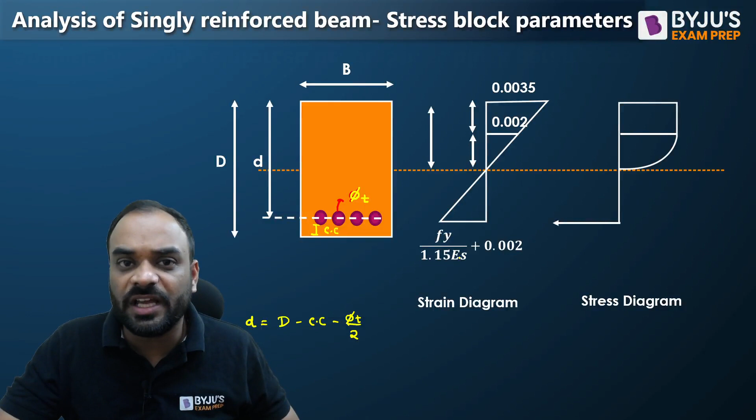What is Es? That is the Young's modulus of elasticity of the steel. If the value is not given, you need to consider it as 2 into 10 raised to power 5 Newton per mm square. So let me write it down. Es is equal to 2 into 10 raised to power 5 Newton per mm square.

Okay. Now guys, another diagram we have is our stress diagram. In the stress diagram, the stress at the level of tension steel is 0.87 Fy. How is it 0.87 Fy? Because the permissible value of stress at the level of tension steel is given as 0.87 Fy, and the partial factor of safety in case of steel is equal to 1.15. So you are able to calculate this very easily.

Let me show you, guys. So permissible stress at the level of steel is equal to 0.87 Fy. How can we write it? Fy divided by 1.15, as this is the partial factor of safety for the steel. If you calculate this, you get the same value, which is 0.87 Fy, right?

The next stress, available at the top fiber of the concrete, which is in bending compression, is equal to 0.45 FCK. Again, this is a permissible stress according to the LSM method. Now guys, how can we calculate this?

Again, it is very simple. So you can write it down. The grade of steel is FCK, or you can say that, but not grade of steel, it is basically the characteristic strength of the concrete is FCK. Now you need to divide this particular value with the partial factor of safety, which is basically 1.5, right?

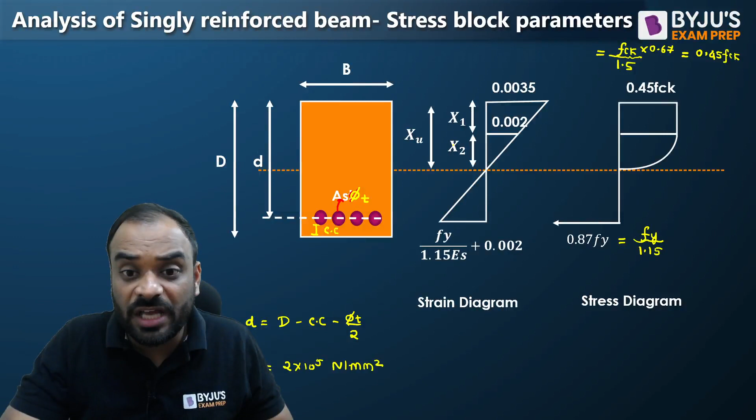Now what we need to do first, we need to analyze the strain diagram so that we can find out the value of x1 and x2 easily. Okay, so let's do the analysis on the strain diagram first. So guys, this is our strain diagram. Let's calculate the value of x1 and x2. We know the value of strain at the top, it is 0.0035, at this level 0.002, and at the level of tension steel, it is equal to Fy divided by 1.15 ES plus 0.002.

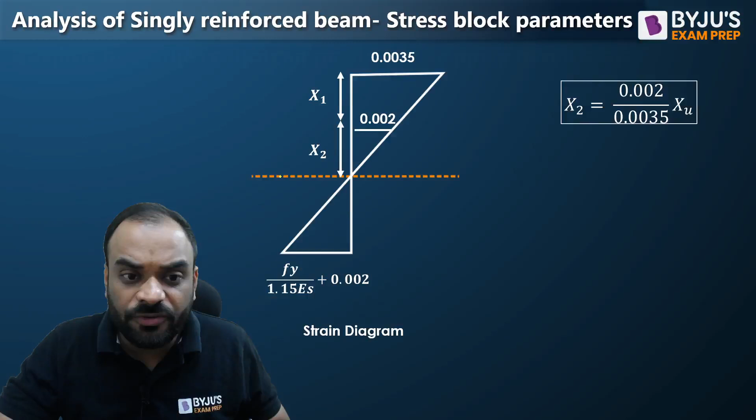Now guys, let us consider this is x1 and this is x2. And what is the value of x2, how we can calculate? By using similar triangle concept. Right now you are able to see here guys, at the level of xu from this location, the value of strain is how much? 0.0035. And at the level of x2 distance from this particular point, it is 0.002. If you take a similar triangle concept, you are able to get the value of x2 easily. And how much it will become? 4 by 7 times of xu.

Clear? Now guys, you can see here the relation between x1 and x2 is equal to how much? x1 plus x2 is equal to how much? It is equal to xu, right? So if you put the value of x2, we'll get the value of x1 easily, correct? So kindly see this, x1 is equal to how much? Just a second, x1 is equal to how much? It is equal to 3 by 7 xu. Now you are able to get the value of x1 and x2.

Done. Now guys, after this, we need to analyze the stress diagram. But to analyze the stress diagram, we should know how to calculate the forces in case of stress diagram. And there is one more point we need to understand. If it is a simple geometry, then we are able to calculate the centroid and the area of that particular shape easily. But guys, if you have a parabolic condition, then what should be the area, what should be the centroid location, that we need to understand. So that's why we need to discuss one simple funda for this particular analysis also.

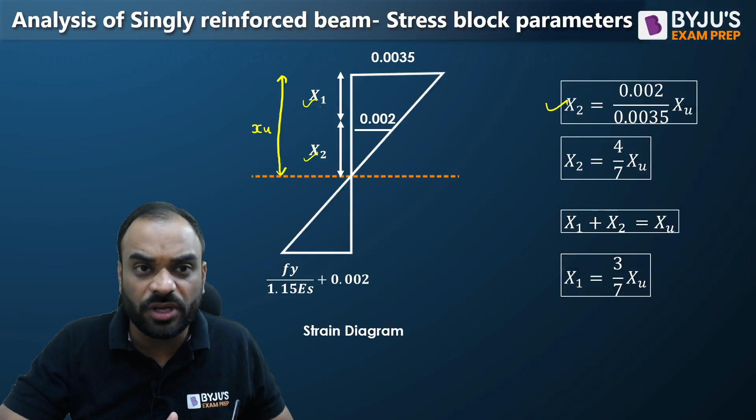Like we will take one rectangular area and we will divide it in two portions. One is 2/3 of that area and second one is 1/3 of that area. And we will discuss what should be the area exactly and what should be the centroid location. Okay. So this is our rectangular shape in which I have drawn one parabolic curve, right, which is trying to divide the area in two parts. One is basically 2/3 area and second one is 1/3 area. So let's understand what are the centroids we have.

Okay, let us consider this is the length L, right, and this is our width B in this direction. Okay, now these are the two areas which we have, 1/3 of B into L and 2/3 B into L, because the total area of rectangle is equal to how much? It is equal to L cross B, correct?

Now guys, what is the centroid for this particular portion? What is the centroid of this particular portion? Let's understand. So this height is basically B. So the centroid of this particular area will be 3/4 times of B from this particular point to this point, and from this point to this point it is 1/4 of B.

In the same way, we can write it down in the direction of length also, like it is 1/4 times of L in this direction and 3/4 times of L in this particular direction. Now what is the centroid of this particular area? It is 3/8 of L in this direction and it is 5/8 of L in this particular direction. Similarly guys, in this direction it is 3/8 of B and 5/8 of B.

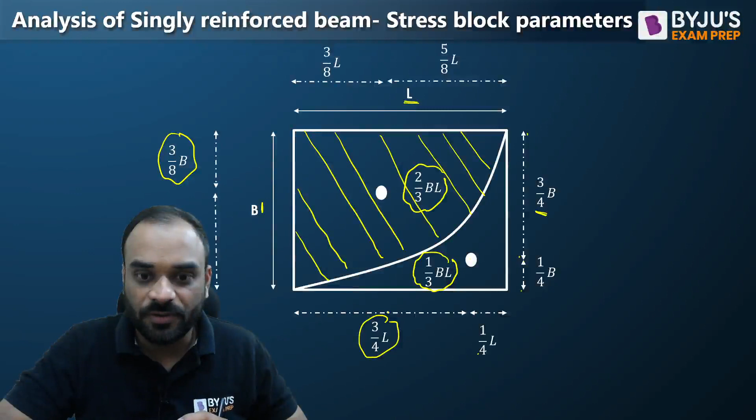Now which area is major for us? We know that guys, in our stress block parameter and in our stress diagram, this is the area which is available in the compression zone, and this area we need to analyze, right? Let me show you that particular area in our figure. So you can see here guys, this is the area which is our 2/3 of B into L, and that we have to calculate also, right?

So guys, in the stress block parameter analysis, we need to find out what should be the total compression force and what should be the total tension force we have and what is the value of lever arm. So let us calculate the C1 force first, right? And then we will calculate the C2 force also. And then we will discuss what is the value of T force and what is the value of Y2 distance.

What is Y2 distance? It is the location of this particular C2 force from the top fiber. In the same way, what is the location of C1 force from the top fiber? That is basically Y1 distance. So let's find out what it is exactly, and it is very simple. Okay, so guys, you already know what is the value of x1 and what is the value of x2. Okay, now let us calculate the C1 force.

So how much is it? C1 force is equal to how much? You need to calculate the area of stress diagram multiplied by width of cross section at that particular level. So first of all guys, we'll try to find out the area of this particular rectangular part. Clear? Then we will calculate what should be the width at that particular level in the beam.

Very simple. So first just try to calculate the area of stress diagram, then width of the cross section at that level. If you multiply it, you will get the force. What is the force? Which is basically C1 and C2, right? Let's do it. So for C1 force, the area is basically 0.45 FCK multiplied by this distance, which is basically x1. This distance is what? X1. So you will get the area of rectangle.

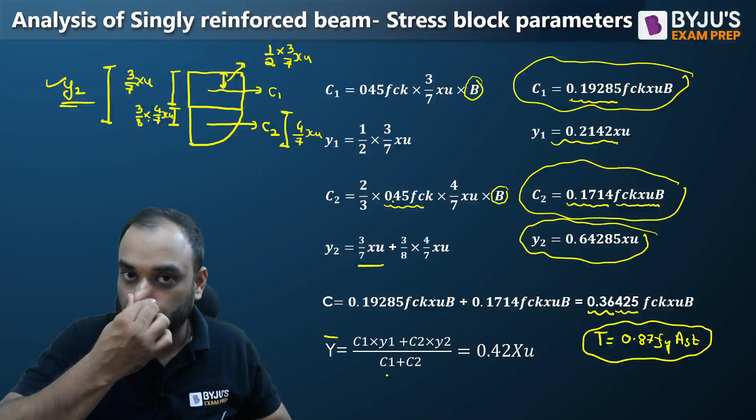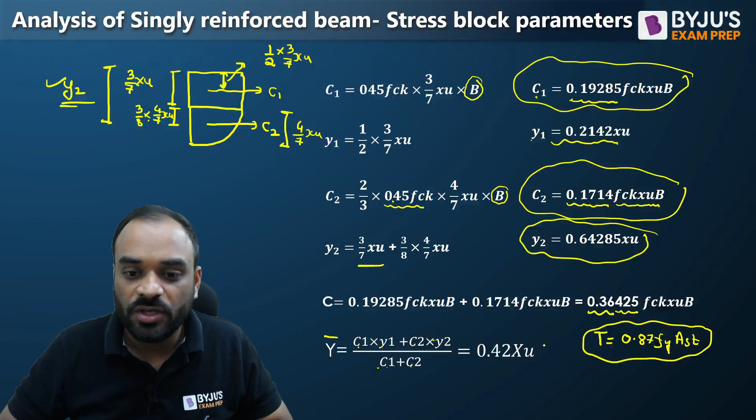Now after calculating T force and C force, we are able to calculate the Y bar distance. Y bar distance is the location of the total C force from the top fiber, right? And I will show you that also in the figure. So how we can calculate it is very simple. You just need to find out the centroid of the total force: C1 into Y1 plus C2 into Y2 divided by total C force, C1 plus C2. So this value is coming around 0.42 XU, you can calculate it also, right?

So guys, in final, we can say that this is our final stress block parameter which we are getting after the analysis, right? So our C force is equal to 0.36 FCK B XU. In the same way, the T force is 0.87 Fy into AST. And what is the distance of the C force from the top fiber? It is 0.42 XU.

So we know that this effective depth is d, right? So d minus 0.42 XU will be our lever arm, right? So that's why, guys, we need to calculate it. Now you are able to understand why we are calculating, because after getting this result, you need to use it to find out the moment of resistance, the actual depth of neutral axis, and the critical depth of neutral axis. Now I hope all of you are able to understand this.